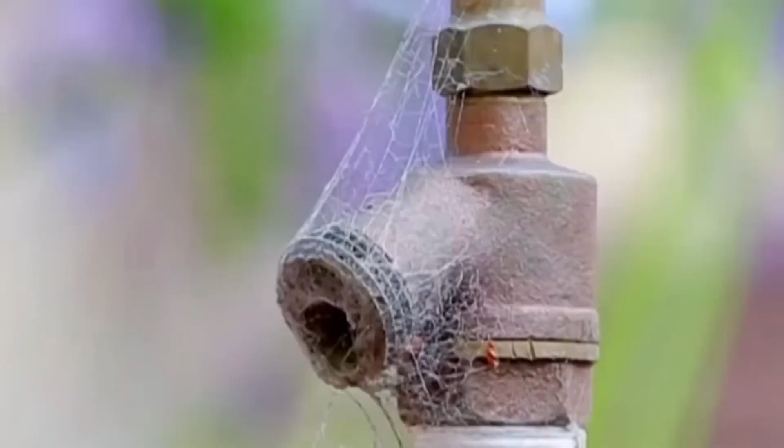At first glance, that might sound contradictory. California is notorious for its water shortages. In many parts of the state, residents are used to saving water year after year, cutting back on everything from showers to lawn irrigation. Farmers, who make up a large share of the state's water consumers, are under constant pressure to conserve every drop for their crops.

With such a strong emphasis on conservation and such tight regulations on water usage, how does building a massive new reservoir, one that releases a huge volume of water into a drought-prone region, make sense? Surprisingly, this is California's strategy to fight back against its increasingly unpredictable water future. Let's dig into the problem first.

California's geography is a major challenge when it comes to water availability. Large portions of the state are made up of deserts. Take the Mojave Desert, for example. It covers more than 13,000 square miles, but receives only 2 to 6 inches of rain per year. With temperatures regularly soaring over 100 degrees Fahrenheit, most of that rain evaporates before it can be of any use.

Then there's the Colorado Desert, covering another 10,800 square miles, where similar conditions prevail: hot, dry, and unforgiving. And don't forget about the sprawling Great Basin Desert, which extends into eastern California. It receives just 6 to 12 inches of rain annually, making the landscape inhospitable to large-scale water storage without major engineering. California's natural environment simply doesn't support stable, abundant water supplies.

But the situation gets even worse when you factor in the drought cycles. In July 2021, for example, Governor Gavin Newsom urged residents to reduce water usage by 15%. That wasn't new. In 2015, amid another severe drought, then Governor Jerry Brown mandated a 25% reduction in urban water use. Why such drastic measures?

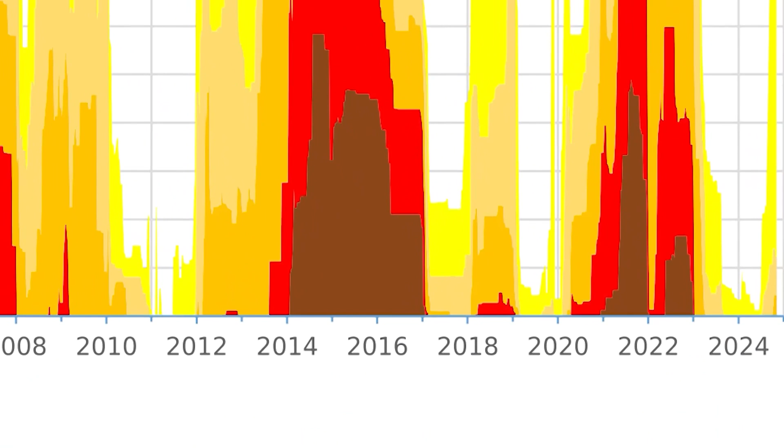It's a vicious cycle. And while these events vary in intensity, one thing is consistent. California regularly runs dangerously low on water. That's why restrictions are essential to prevent total water collapse during dry years.

Oddly enough, while the state was dealing with drought, some regions were hit by severe floods. During these rare but intense storms, hundreds of millions of gallons of rainwater fell in just days. Too much, too fast. The flooding damaged homes, infrastructure, and in some cases took lives. That's the paradox of California: not enough water when you need it, and too much when you don't.

Naturally, this contradiction sparked a big idea. What if California could capture floodwaters and store them for future use? This idea dates back to the 1950s and 60s, when the state first launched the California State Water Project, SWP. It led to the construction of one of the world's largest water infrastructure systems.

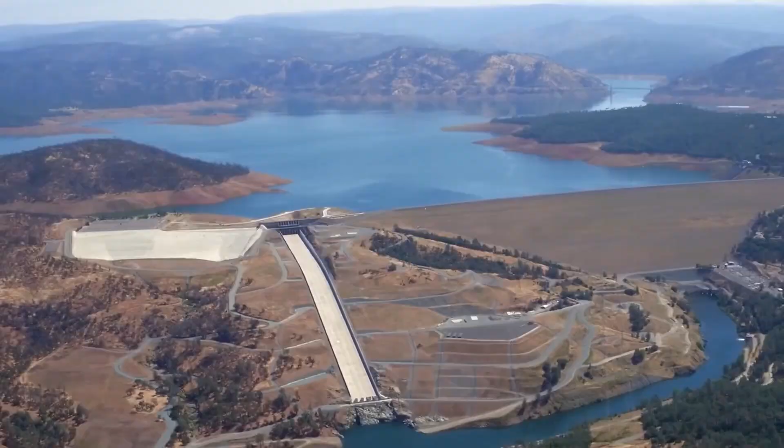Key components of the SWP include the San Luis Dam, which created the San Luis Reservoir, capable of storing 792 billion gallons. Another is Lake Oroville, formed by damming the Feather River, with a capacity of 1.1 trillion gallons. Water from these reservoirs is transported through a vast network of pipelines and canals. The centerpiece of this system is the California Aqueduct, a 460-mile water highway that moves water across regions, capable of carrying 98,000 gallons per second.

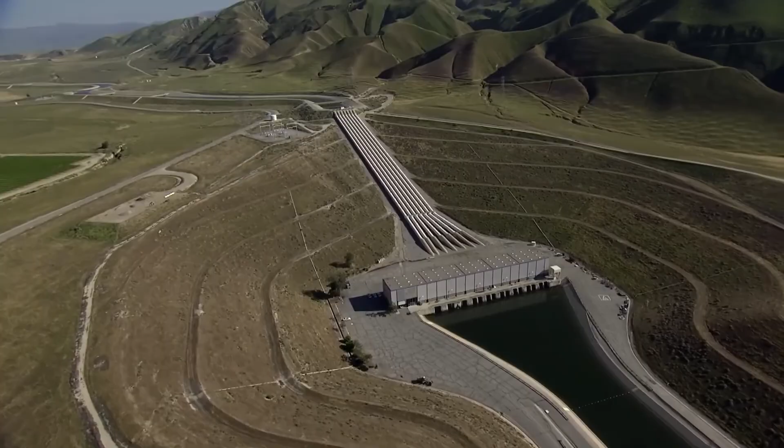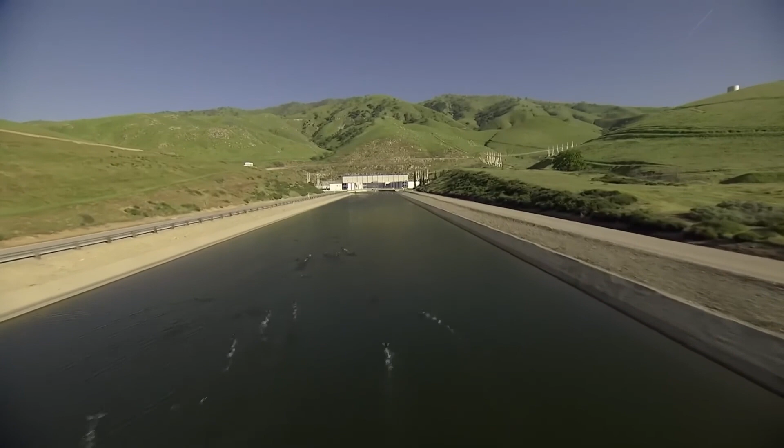At the southern end of the aqueduct lies the Edmonston Pumping Plant, one of the most powerful water lifting stations on Earth. To give you an idea of its might, it can lift water nearly 2,000 feet, higher than the Eiffel Tower. The SWP is a marvel of engineering, and it served California well for decades.

But over the years, demand has outgrown supply. The state's population has more than doubled. Agricultural and industrial needs have ballooned. Meanwhile, climate change has made rainfall patterns even less predictable.

That's why the state is building something new, the Sites Reservoir, just west of Maxwell. Why here? The location is ideal. The valley is shaped like a natural basin, surrounded by hills and mountains, minimizing the need for artificial barriers. It's lightly populated, which avoids the social disruptions that dams often cause. And with sparse vegetation, environmental impact is lower.

Planning for the reservoir started in 1996. Over the next 18 years, more than $50 million was spent on feasibility studies.

The project will require 12 dams, 3 large ones and 9 smaller ones, to contain the water. The tallest of these, the Golden Gate Dam, will rise 285 feet. Not quite a record breaker, but still impressive. For comparison, Lake Oroville's dam stands at 770 feet, making it the tallest in the U.S.

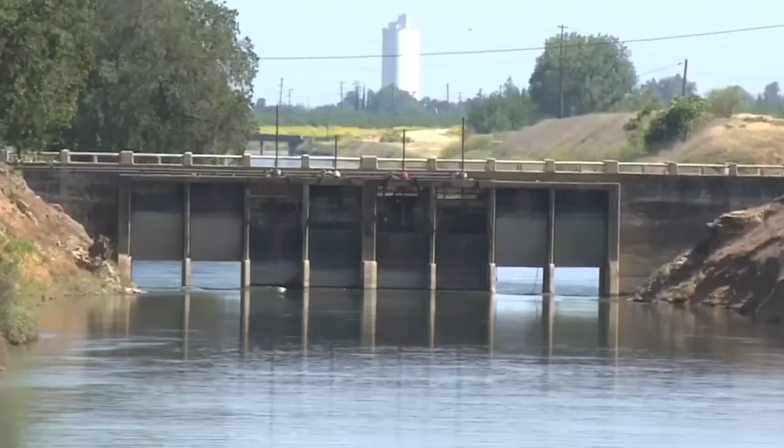The site's reservoir will be enormous. It will stretch 13 miles from north to south and 4 miles across, with a maximum depth of 262 feet. When full, it will store up to 475 billion gallons, ranking it among California's largest reservoirs.

But what makes sites truly unique is its off-stream design. Unlike traditional dams, it won't block a river. Instead, it will divert water from the Sacramento River, but only during times of high flow, and only after environmental and legal obligations are satisfied.

During droughts, water from sites can be released back into the system, providing a much-needed buffer against shortages. According to officials, the stored volume is enough to supply 7.5 million people for an entire year.

The water will be moved through existing infrastructure, pumping stations, pipelines, and canals, reducing the need for new construction and minimizing environmental disruption. And there's another advantage.

A large portion of the reservoir's water will be reserved for environmental purposes. California's ecosystems have suffered during past droughts. Sites is designed to stabilize river flows, improve wetland conditions, and even help endangered fish species, including the Sacramento salmon.

Because the reservoir won't sit on the river itself, salmon migration routes remain unobstructed. That's a major win for conservationists. Sites may also work in conjunction with Shasta Lake to deliver cold water, essential for salmon spawning.

Still, it's not all good news. Some environmental groups remain opposed. While sites won't directly dam a river, it will draw water from the Sacramento, and during peak diversion, it could take up to 60% of the river's flow.

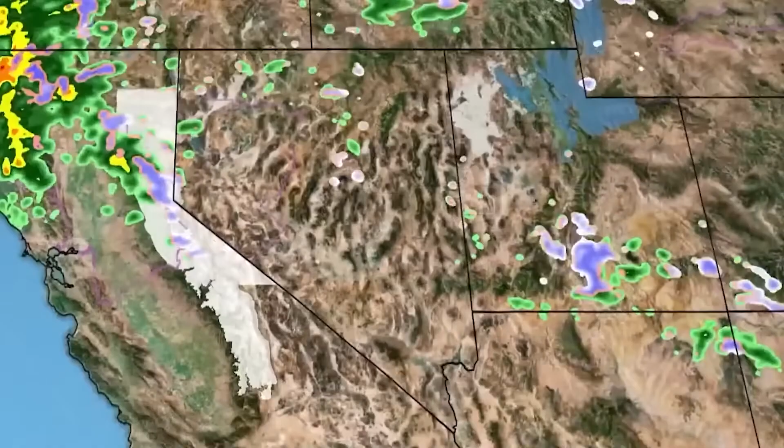Critics worry this could endanger not just salmon, but 23 other vulnerable species. Evaporation is another concern. With California's high temperatures, it's estimated that 9.7 billion gallons of water will evaporate from sites each year, water that will need to be replaced.

There's also the issue of emissions. In 2023, the group Friends of the River, backed by the Tell the Dam Truth campaign and funded by outdoor clothing brand Patagonia, released a report stating that the site's project could emit around 362,000 metric tons of CO2 annually during operation. Much of that comes from methane, released as submerged vegetation breaks down.

Despite these concerns, many believe the benefits outweigh the drawbacks. The site's reservoir is scheduled for construction between 2026 and 2032, and it's a key part of California's water strategy. But it won't be enough on its own.

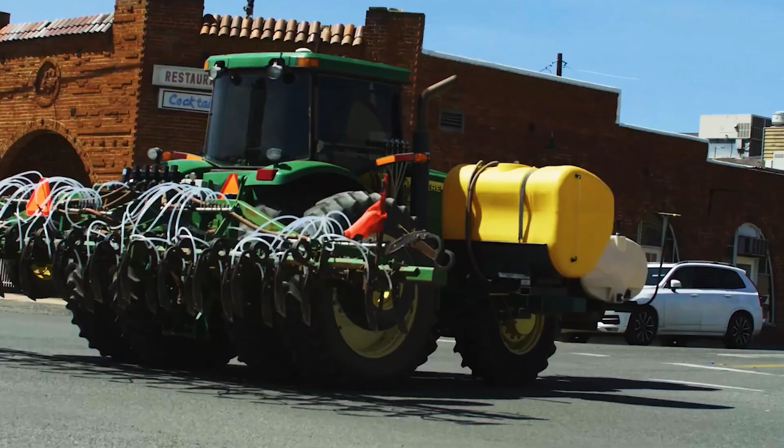That's why California is also turning to wastewater reuse. As of 2025, the state treats over 224 billion gallons of wastewater each year. Most of this is used in agriculture, which consumes about 80% of California's developed water supply. Reusing water here frees up more clean water for households and industry.

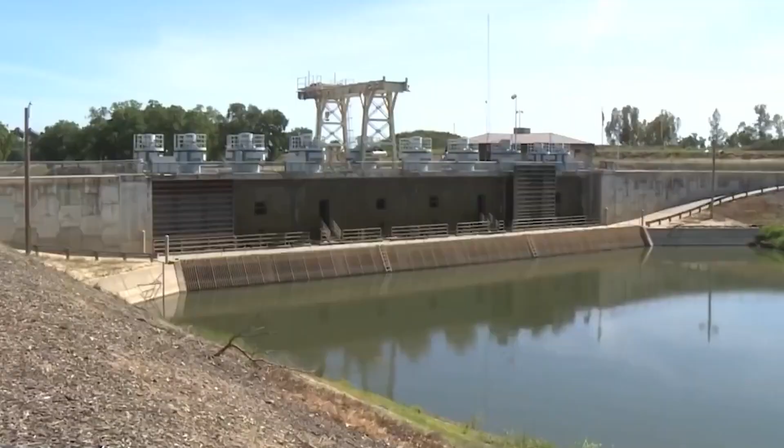The state is also investing in groundwater recharge, injecting treated water into aquifers for future use. In Orange County, one facility alone recharges 98 million gallons per day. Industries are also embracing recycled water for cooling systems, concrete mixing, and even paper production. Why? It's cheaper than raw fresh water and doesn't require extreme purification.

So maybe, in the not-so-distant future, California will finally break its cycle of drought and desperation, not by changing the climate, but by changing the way it stores, uses, and values water.

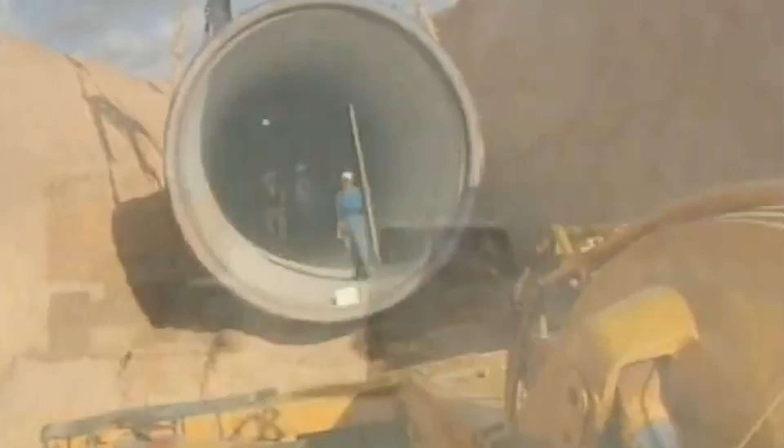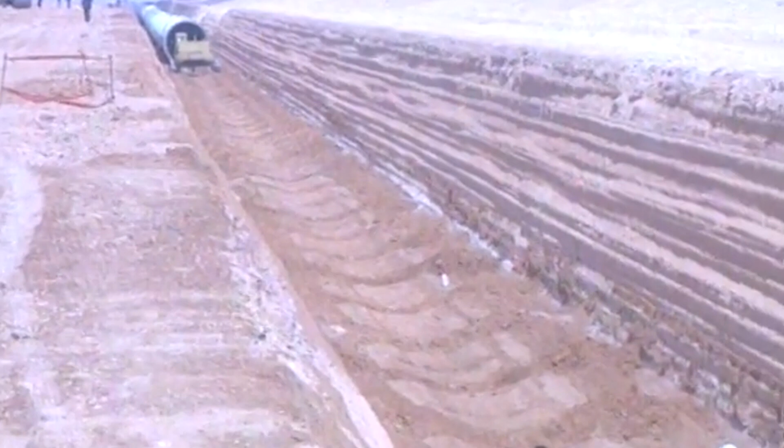This is the Great Man-Made River, a colossal engineering feat buried beneath the sands of Libya. Dubbed the world's largest irrigation project, the Libyan government even went as far as calling it the eighth wonder of the world. And to many, that wasn't just propaganda.

This bold and ambitious project was the dream of Libya's former leader, Muammar Gaddafi. His vision, to turn Libya's arid desert into fertile land as green as the Libyan flag during his regime, a completely green banner representing the Libyan Jamahiriya.

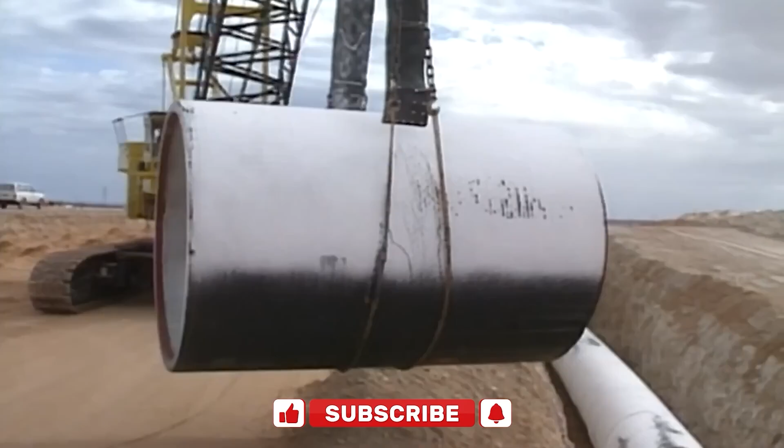But how close did they come to realizing that dream? How was this river built beneath the desert? And what has become of it today? Let's dive into the story of a river without a drop of surface water, a mega project born out of desperation, vision, and oil money.

Let's begin with the geographic reality of Libya. It's a country located in North Africa, with its entire northern edge lining the Mediterranean Sea. But beyond that narrow coastal strip lies a vast and unforgiving landscape, the Sahara Desert.

About 90% of Libya's land area is desert, and half of that is classified as sand desert, a literal sea of sand dunes and rock. Libya's biggest geographical disadvantage is its lack of freshwater resources. There are no permanent rivers or lakes to speak of.

Instead, it has wadis, dry riverbeds that occasionally fill with water after rare rainstorms, only to evaporate quickly. These conditions make Libya one of the driest nations on Earth. Most of the country's rainfall is concentrated in a tiny sliver along the coast, which makes up less than 5% of Libya's total area. Even there, average annual rainfall is just around 4 inches. In the interior, rain is practically non-existent, falling in brief heavy showers at the end of winter and early spring. That's it. Unsurprisingly, most of the population clusters in cities along the coast, where water is at least somewhat available.

According to data from 2020, nearly 80% of Libyans lived in urban areas, roughly 5.4 million people out of a total population of 6.8 million. In rural regions, people survive in small pockets, mainly around oases, using traditional irrigation methods for farming. But water access remains a constant struggle.

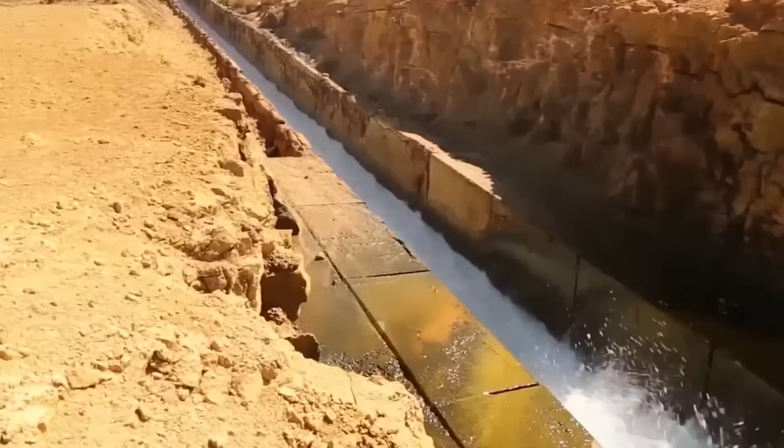Water scarcity is a well-known crisis in the Middle East and North Africa. The reasons are many: scorching temperatures, high evaporation rates, limited rainfall, and a growing population. Libya is a textbook example. In fact, the World Resources Institute ranks Libya as the 6th most water-stressed country on the planet.

Back in the 1960s, Libya began experimenting with desalination, removing salt from seawater to make it drinkable, but it was an expensive and limited effort. Then, in 1969, everything changed. Muammar Gaddafi seized power in a military coup, and soon his administration began eyeing a much grander solution: the Great Man-Made River Project. Interestingly, Libya's water woes actually predate Gaddafi.

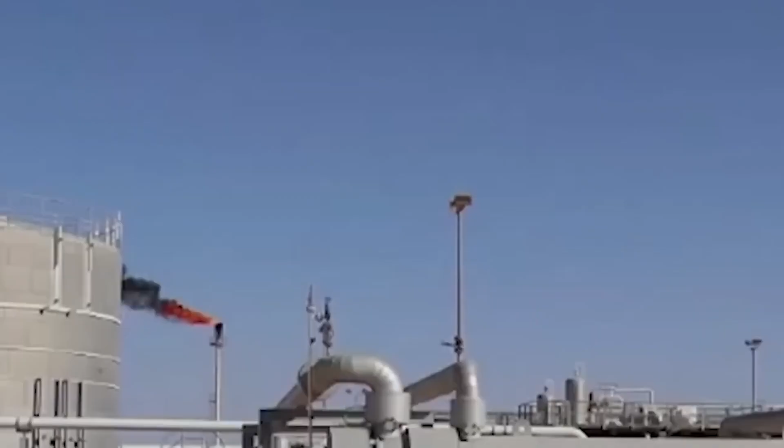During the 1930s, under Italian colonial rule, water shortages were already a major issue, but back then Libya lacked the money, manpower, and technology to tackle such a challenge. That all changed in the 1950s, when oil exploration began in earnest. In 1953, while drilling for oil in southern Libya, foreign companies made an unexpected discovery. Not only did they strike large oil reserves, they also tapped into massive underground reservoirs of freshwater. It was like hitting the jackpot twice.

Further studies revealed that this water came from the Nubian sandstone aquifer system, one of the largest fossil aquifers in the world. This ancient groundwater is believed to be between 10,000 and 1 million years old, formed back when the Sahara was a much greener, wetter region. Over millennia, this water became trapped deep underground beneath thick layers of sandstone. The aquifer stretches beneath 4 countries: Libya, Chad, Sudan, and Egypt, covering an astonishing 770,000 square miles. It's estimated to contain around 39 quadrillion gallons of water. That's an almost incomprehensible amount.

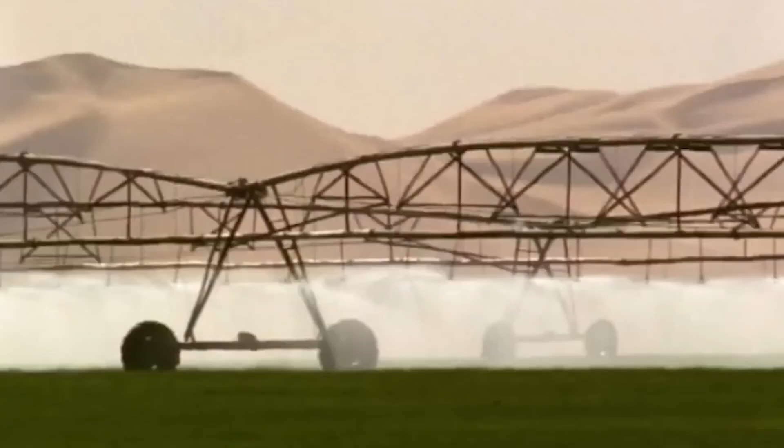At first, the Libyan government considered using this water for large-scale desert agriculture, but by the early 1980s the strategy shifted. A new plan emerged: instead of trying to farm in the desert, why not transport the water to the densely populated coast? It seemed far more feasible than investing in costly desalination plants that the country couldn't afford to operate or maintain.

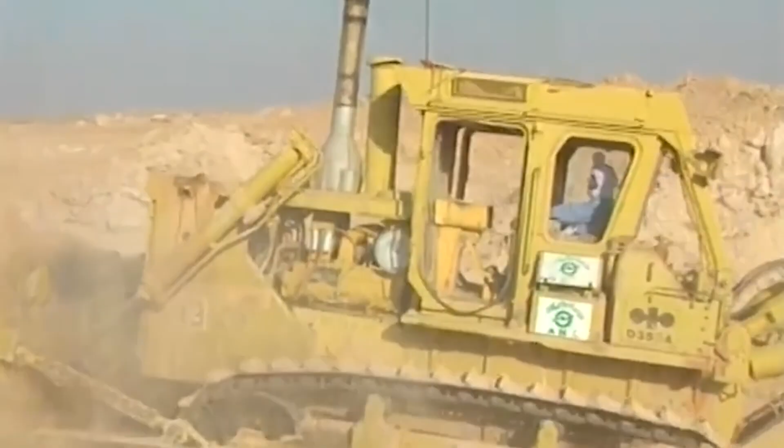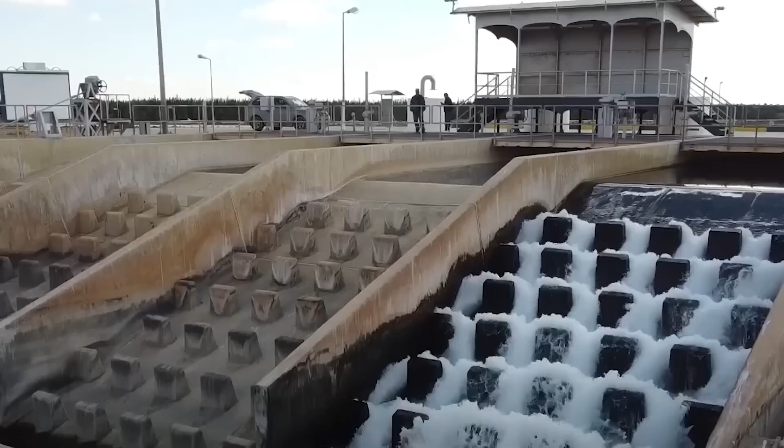The coastal aquifers, especially around Tripoli, were also becoming increasingly salty and polluted due to overuse. Meanwhile, a giant reservoir of pristine freshwater lay untouched in the desert interior. The only problem? No one lived near it. The water had to be brought hundreds of miles across harsh, empty terrain. Thus, the Great Man-Made River Project was born.

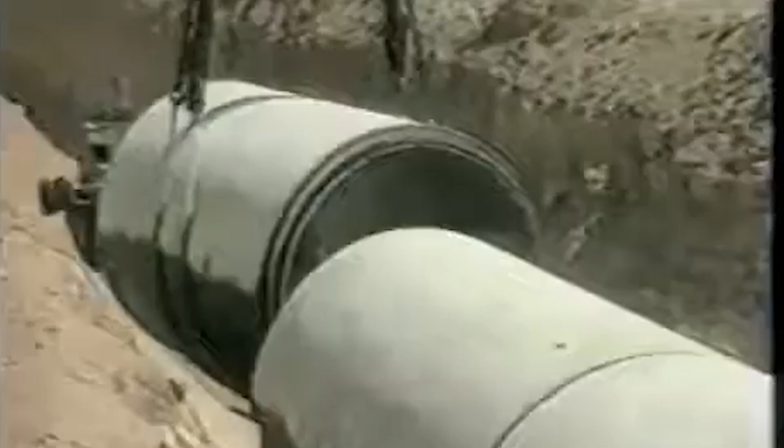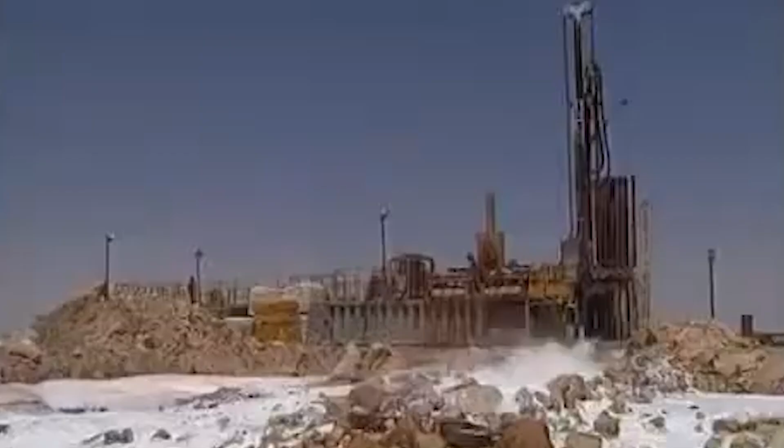Despite its name, it's not a river at all, but an immense network of underground pipes, aqueducts, reservoirs, and pumping stations designed to move water from the heart of the desert to Libya's cities and farmlands along the Mediterranean coast. But building such a river was no small feat. Construction was divided into multiple phases. The idea was to drill deep wells, some over 1,600 feet into the ground, tap into the aquifer, and then transport the water through a massive system of pipes.

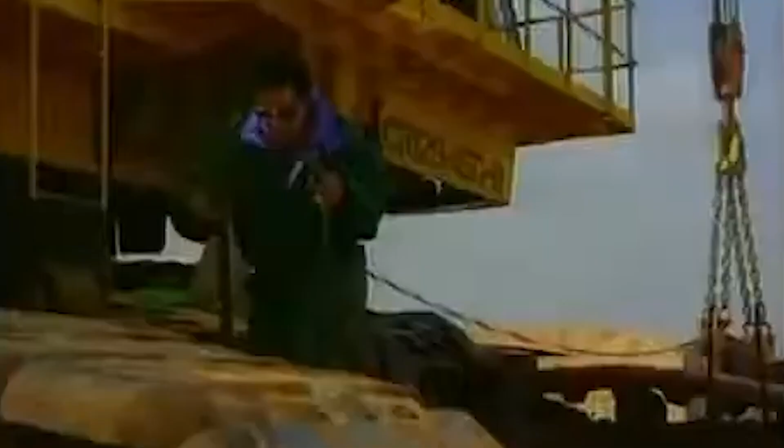By the time it's completed, the network is expected to span over 2,500 miles, with a capacity of more than 1.6 billion gallons per day. In 1984, Gaddafi officially launched the project and laid the foundation stone near the Sarir Aquifer in eastern Libya. The first phase of the project, known as GMR-1, was focused on 2 fields, Tazerbo and Sarir.

Hundreds of deep wells were drilled, and the water was pumped through twin pipelines to Ajdabia, where it was stored in large reservoirs. From there, it was distributed to the coastal cities of Benghazi and Sirte. By 1991, Phase 1 was complete. It consisted of a 990-mile-long double pipeline capable of transporting 528 million gallons of water per day.

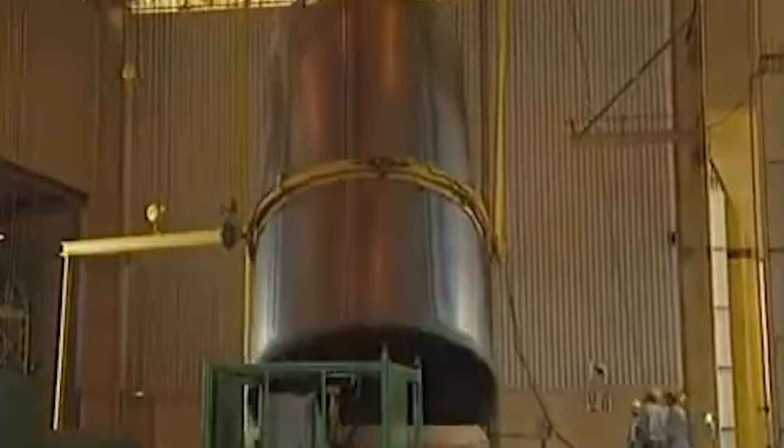To build it, engineers installed a staggering 250,000 sections of reinforced concrete pipe, each 13 feet wide and 23 feet long. These were the largest precast concrete pipes ever made at the time, manufactured at 2 giant plants inside Libya using steel-reinforced, pre-stressed concrete. The pipes were placed into 23-foot deep trenches using custom-designed cranes and bulldozers. Each joint was sealed with heavy-duty rubber gaskets and cement grout before being buried.

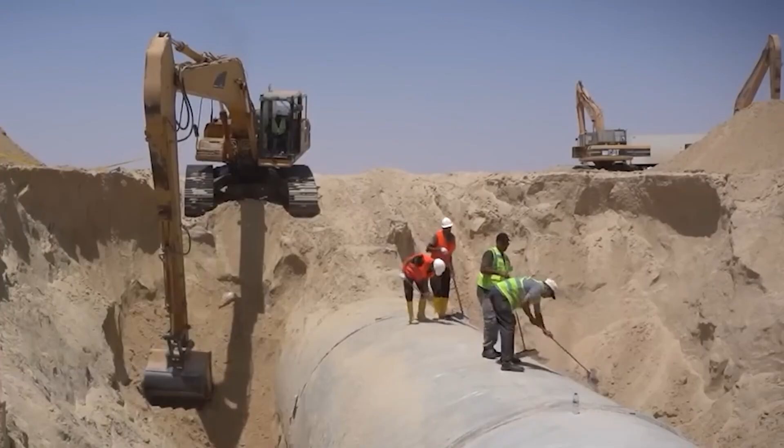The construction also included massive reservoirs. For instance, one reservoir near Ajdabia spans over 3,300 feet in diameter and holds more than 6 billion gallons of water, essentially a man-made lake. The numbers are jaw-dropping: over 5 million tons of cement were used, enough to build 20 Great Pyramids of Giza.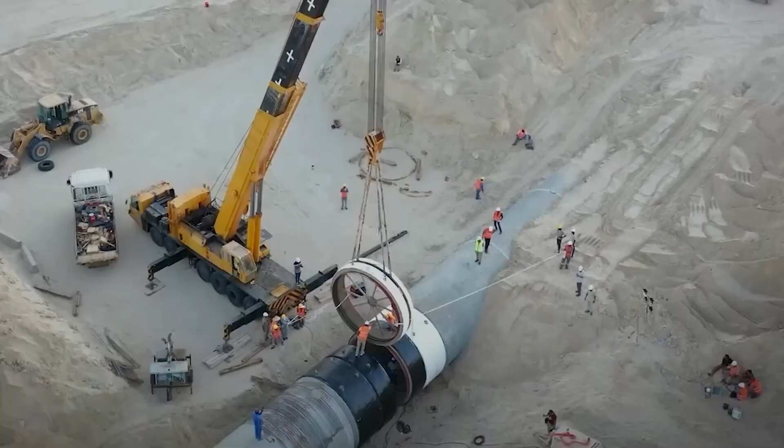The amount of steel wire used in the pipe reinforcement could encircle the Earth 280 times. Just to appreciate the scale, consider this: Libya even built a monument out of one of these pipe segments to showcase the size of a single piece.

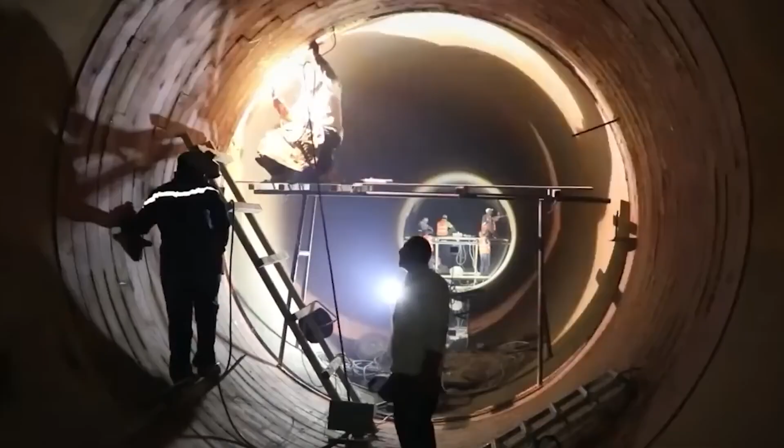Following the success of Phase 1, the second major section, GMR-2, was launched in western Libya. Its goal was to supply water to the capital, Tripoli. Phase 2 began delivering water in 1996, pulling from wells in the Jabal Hasawna area. Additional phases were planned to connect other regions of the country, with the long-term vision of supplying water for agriculture, domestic use, and eventually industry.

Water from the Great Man-Made River was intended to revolutionize farming in Libya. In theory, it would irrigate thousands of acres of land, boost food security, and reduce reliance on imports. And for a time, it seemed to be working.

But the project wasn't without criticism. Many scientists warned that fossil water is a non-renewable resource. Once it's used up, it's gone forever. The Nubian aquifer is not actively replenished, especially not in a region where rainfall is so rare. Some also questioned the environmental and geopolitical implications of extracting water shared by multiple countries.

Then came the civil war. After Gaddafi's fall in 2011, Libya plunged into political chaos. Maintenance of the Great Man-Made River became difficult. Many of the pumping stations and pipelines were damaged during the conflict. In recent years, armed groups have even used water flow as a bargaining chip, cutting supply to cities like Tripoli for political leverage. What was once a national symbol of pride is now struggling to stay functional.

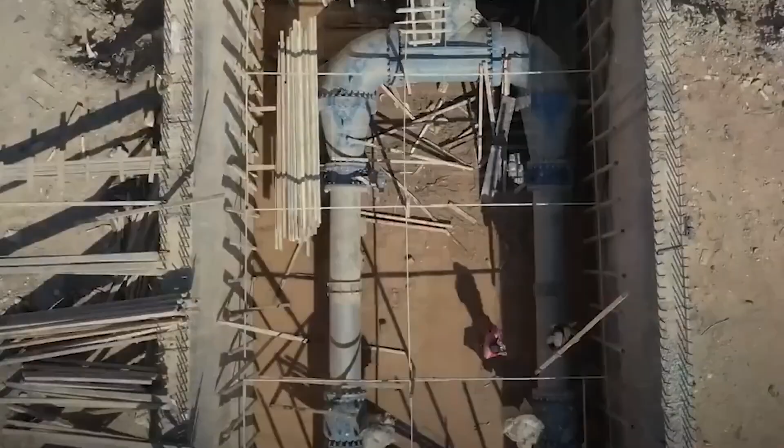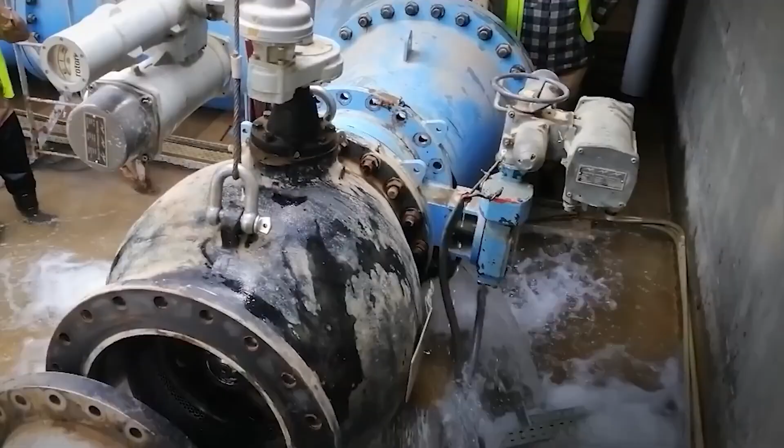Still, the Great Man-Made River remains a powerful example of human ingenuity, a testament to what's possible even in one of the harshest environments on Earth. Whether it will continue to provide water to future generations, however, depends on Libya's stability, resources, and commitment to managing this fragile legacy. So, did they manage to turn the desert green? For a moment in history, they came close, but the river, like the nation that built it, now stands at a crossroads.

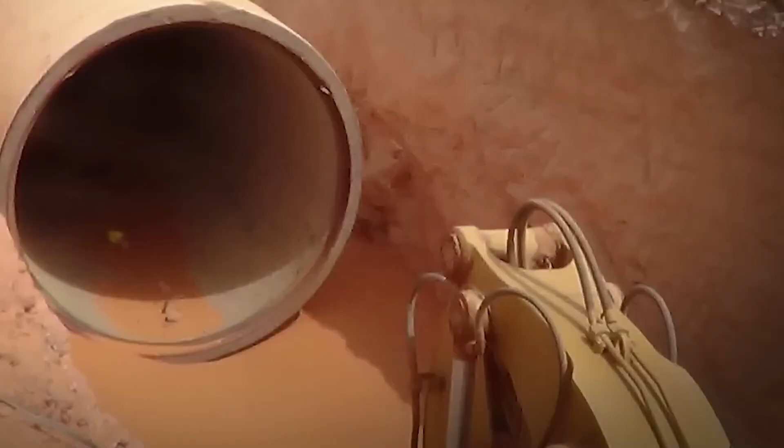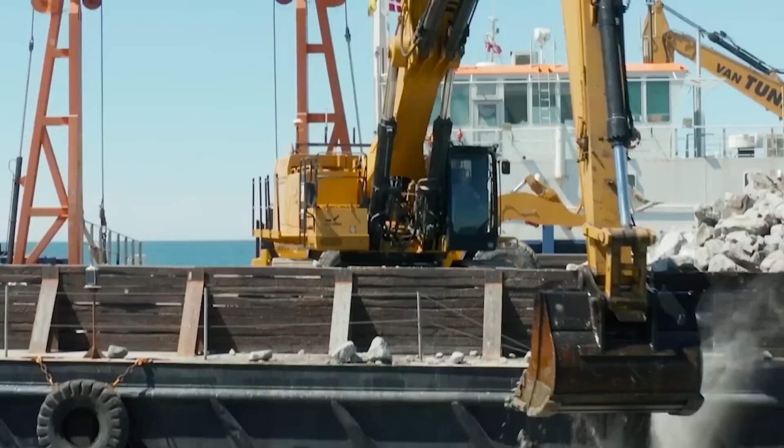There are 9 countries that border the Baltic Sea, but recently, global attention has focused on just 2 of them: Germany and Denmark. Why? Because nestled between these 2 nations is the site of one of the most ambitious infrastructure projects in European history.

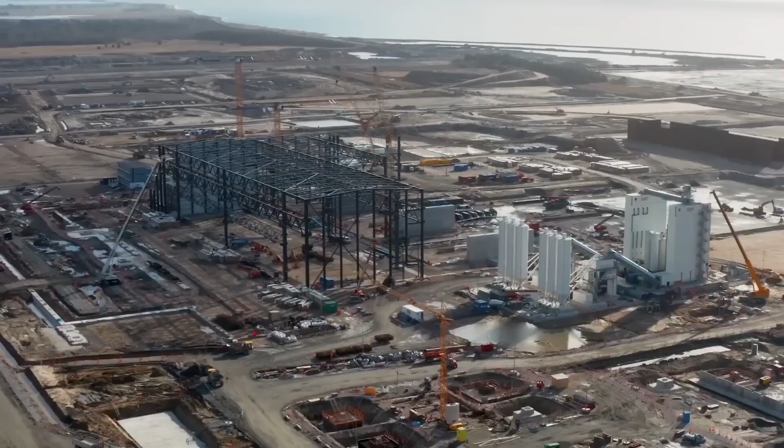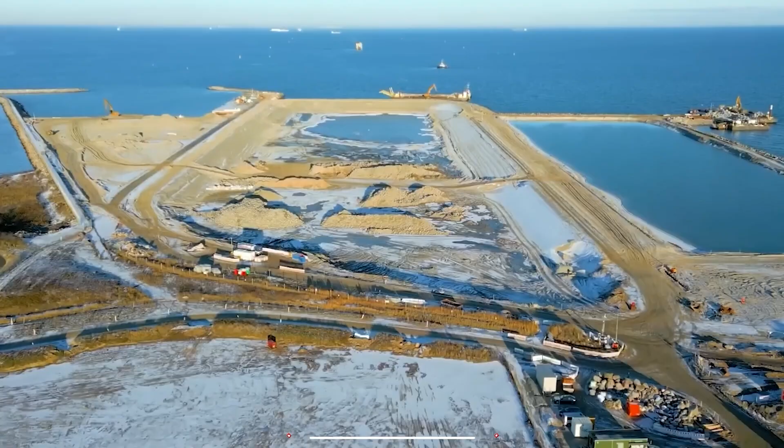If you sail through this area, you'll notice something unusual: artificial land formations, newly carved out channels leading into the sea, and at times, as many as 70 ships scattered across the horizon. Not exactly your average maritime traffic. These vessels weren't there for sightseeing. They were part of a massive operation that involved digging up more than 76 million cubic feet of soil and rock from the seabed. So what's going on here?

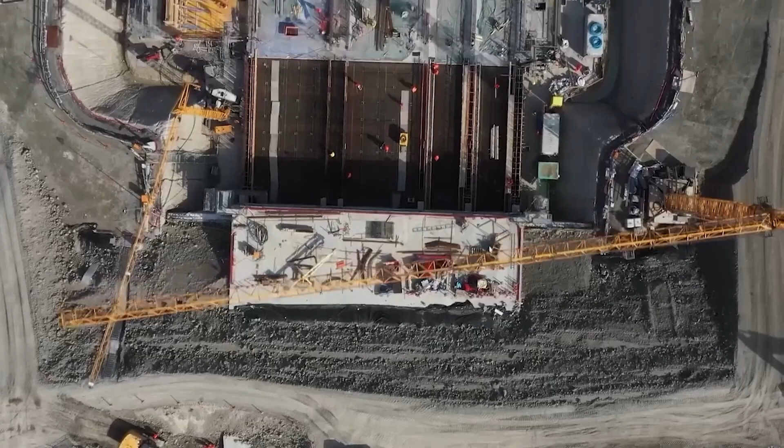It's all part of the Fehmarnbelt Fixed Link, a 10 billion euros megaproject that's not just rewriting engineering records, but also transforming how Europe connects. Off the coasts of Germany and Denmark, 2 entirely new harbors have been constructed, each capable of handling nearly 100,000 tons of raw materials per week. An enormous production plant, covering roughly 11 million square feet, has also sprung up.

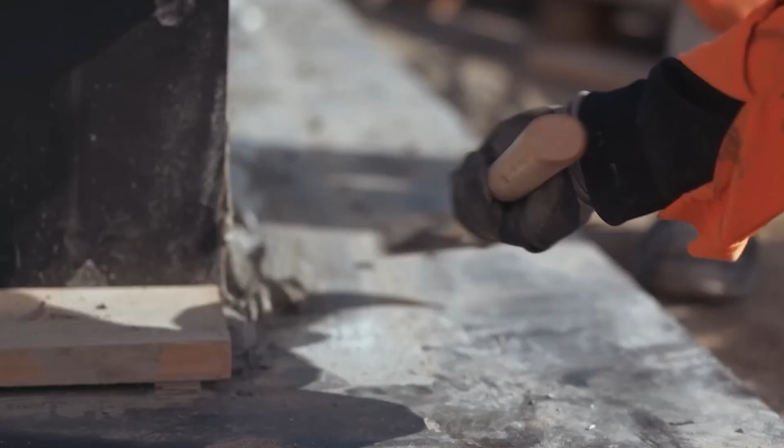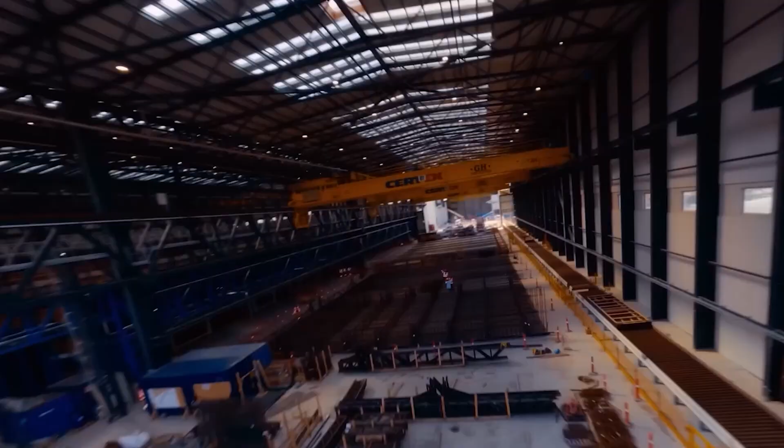All of this is to make way for a tunnel. But not just any tunnel. This project is building what will soon be the world's longest immersed combined road and rail tunnel, a direct connection between the German island of Fehmarn and Denmark's Lolland Island. Up until now, crossing between the 2 meant relying on a ferry, a process that involved queuing up, boarding, and sitting through a 45-minute ride across the strait.

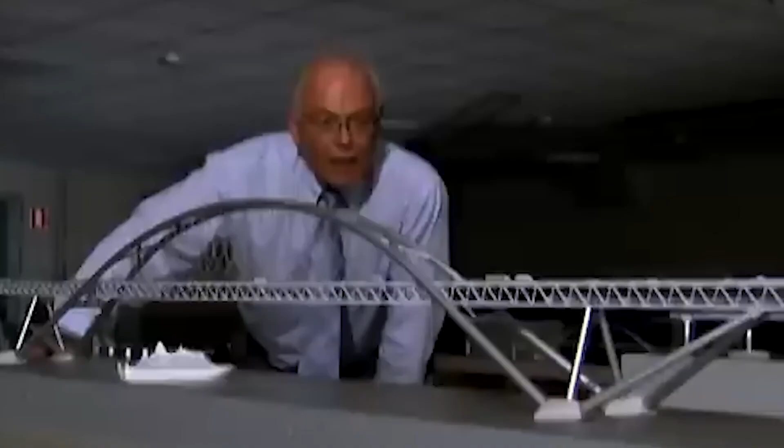And that's on a good day. Storms, strong winds, or fog could easily delay service by hours, so the idea of a permanent, fixed link has been on the drawing board for decades, since at least the 1990s. Initially, the concept was to construct a 12-mile cable-stayed bridge with a 4-lane highway and 2 electrified railway tracks. The design was dramatic, featuring 4 giant pylons, each nearly 920 feet tall, and 3 central spans, each stretching 2,375 feet.

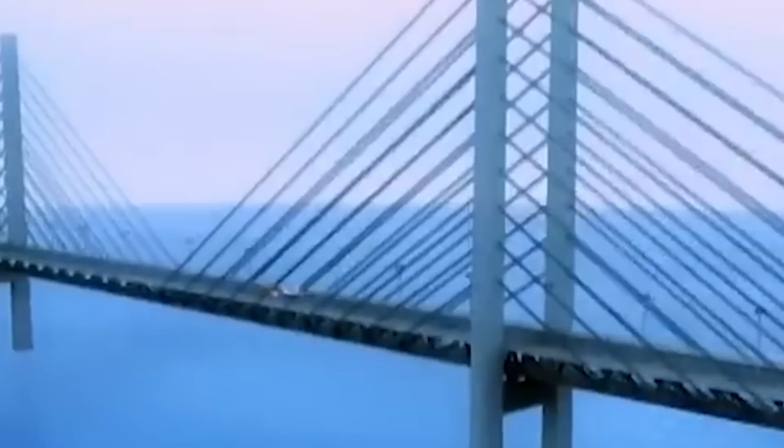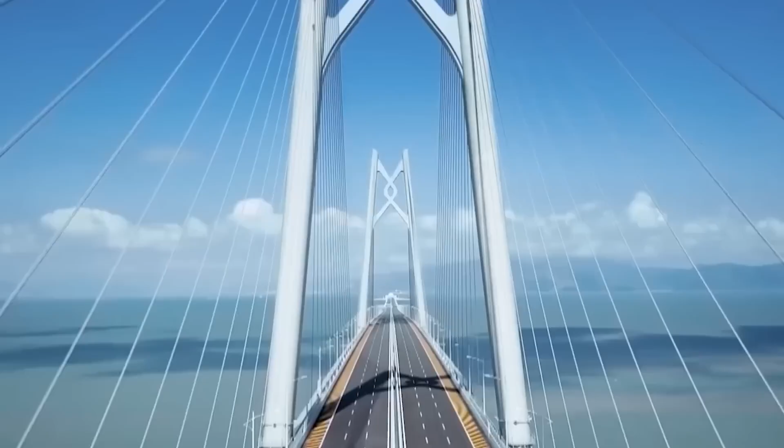If built, it would have set world records for the longest spans on a combined road-rail bridge. Construction was supposed to begin with the goal of opening in 2018. The Danish company Femern AS was awarded the contract to develop the project. But then came a major pivot. In 2010, after extensive studies and engineering assessments, Femern AS concluded that a tunnel would be the better option. The reason? Fewer technical risks and a more predictable construction process.

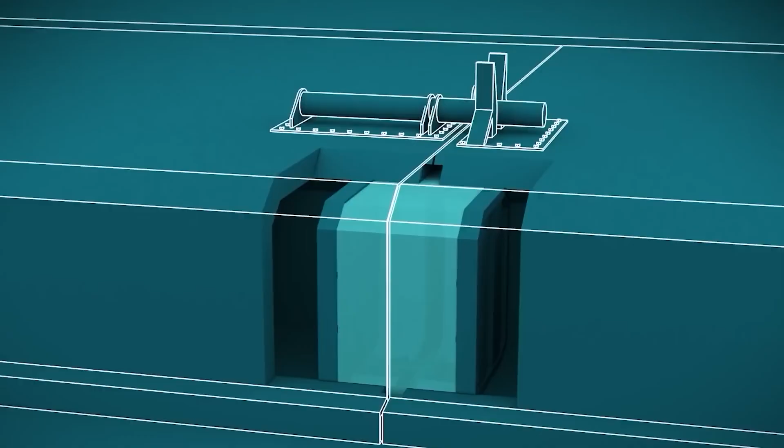The seabed's geology, with its challenging mix of soft clay and hard limestone, made the bridge option far more complex and risky. Plus, the cost difference between the bridge and the tunnel was surprisingly small: 5.2 billion versus 5.5 billion euros. Construction time wasn't drastically different either: 5.9 years for the bridge versus 6.5 years for the tunnel. So the plan shifted. The tunnel became the official design. The tunnel, once complete, will stretch 11 miles, about 18 kilometers, and carry both road and rail traffic.

It will consist of 2 double-lane motorways, 2 electrified railway tracks, and a service tunnel in the center. To support such a massive structure, construction had to start not just with digging, but with building the facilities required to produce and transport the enormous materials needed.

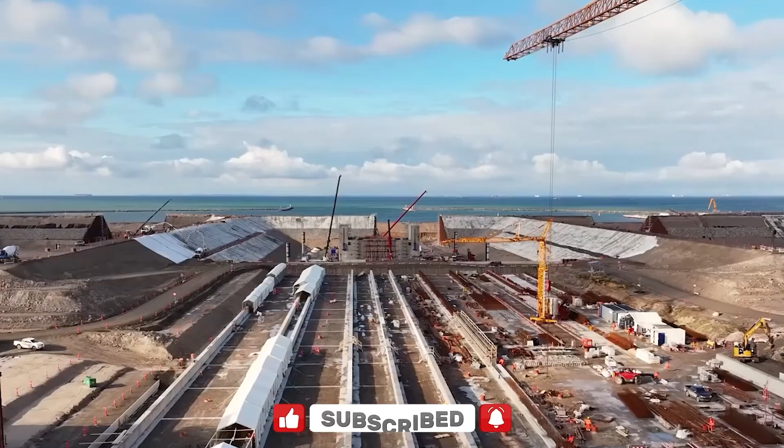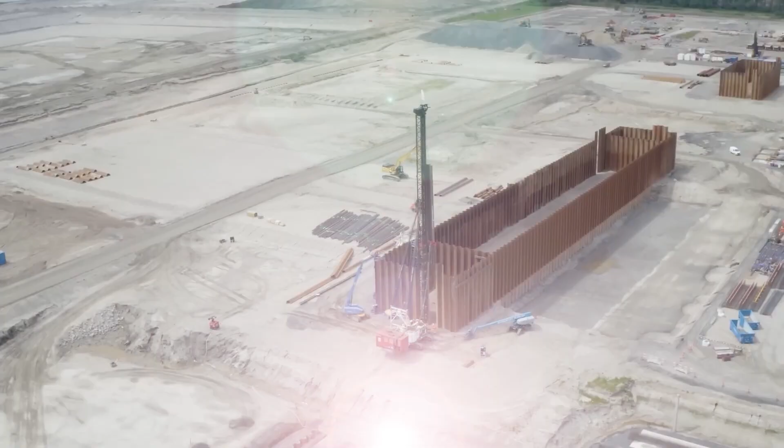That's where the gigantic manufacturing plant comes in. Built near the Danish town of Rødbyhavn on Lolland, this facility is the largest of its kind in the world. Inside, 6 production lines churn out the precast concrete elements that will form the tunnel. Each segment is a monster in its own right, 712 feet long, 131 feet wide, and 33 feet high. And they weigh a staggering 73,500 tons, just shy of a fully loaded cruise ship.

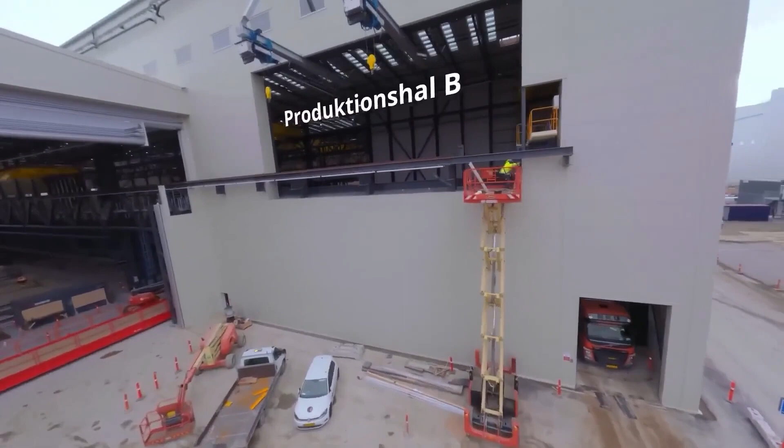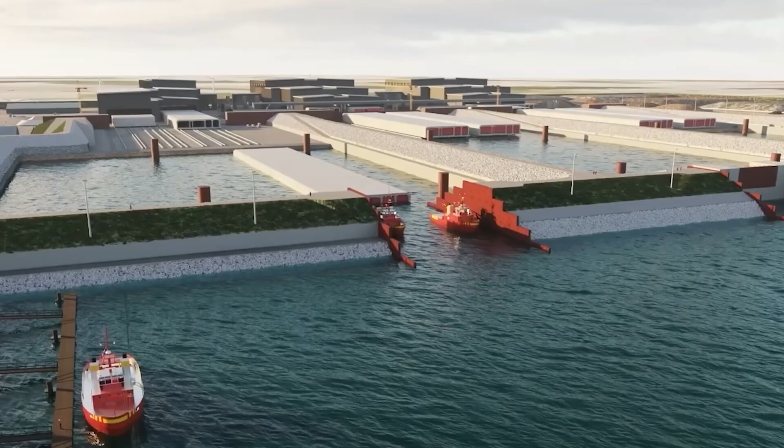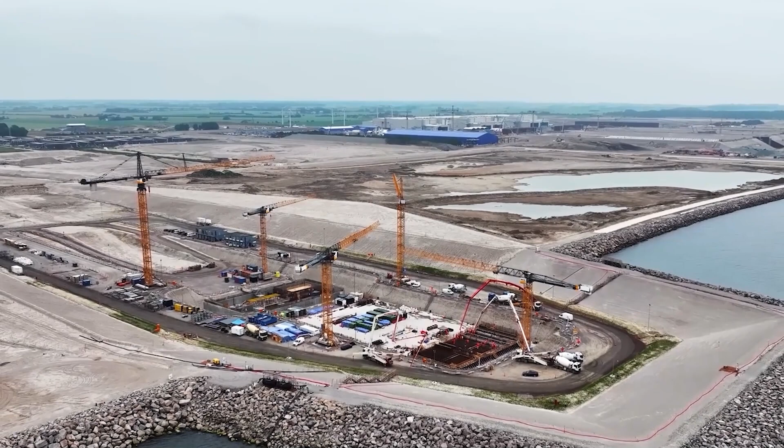In total, 79 of these standard tunnel segments will be needed. On top of that, special segments will be created to house technical equipment and emergency access systems. And since transporting these massive tunnel elements from distant locations would be logistically impossible and prohibitively expensive, the production plant was strategically built just a few miles from the actual tunnel site. Even the harbors were purpose-built to receive raw materials like gravel, sand, cement, and steel, capable of handling tens of thousands of tons weekly. The German side at Puttgarden also got its own smaller port to support the construction effort.

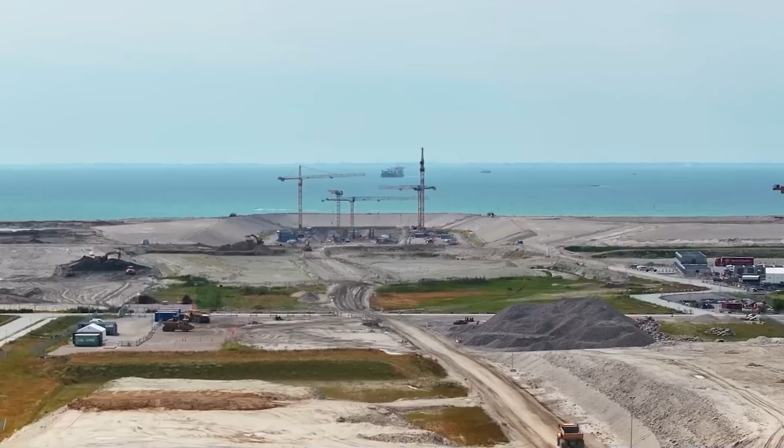By 2024, dredging operations were in full swing. Ships of every kind filled the Fehmarnbelt, cutter suction dredgers, trailing suction hopper dredgers, and specialized stone clearance vessels. Their mission was to dig an 11-mile trench between Fehmarn and Lolland. The trench measured up to 164 feet wide and almost 50 feet deep. The seabed's natural conditions were tough, ranging from soft clay to hard limestone, but the specialized fleet handled it all.

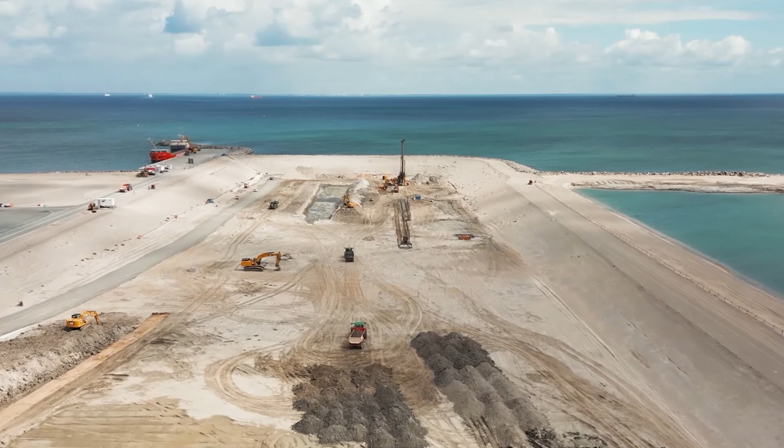Rather than dumping the excavated material, engineers decided to reuse it. The soil and rock were transported to a designated area off Rødbyhavn to create 741 acres of new land. This reclaimed land will eventually become a mix of natural habitat and recreational zones, complete with beaches, parks, and trails.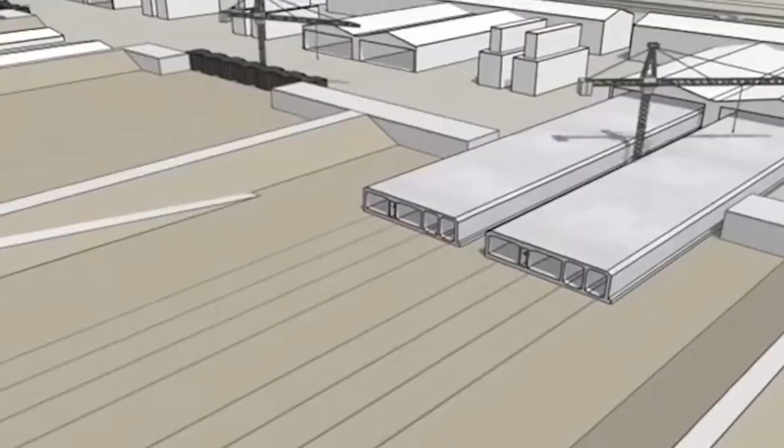With the trench now complete and reinforced with gravel, the next monumental step begins, laying down the tunnel sections. Entrances to the tunnel have already been constructed on both Lolland and Fehmarn. These massive portals serve as gateways for the submerged structure that will rest beneath the sea.

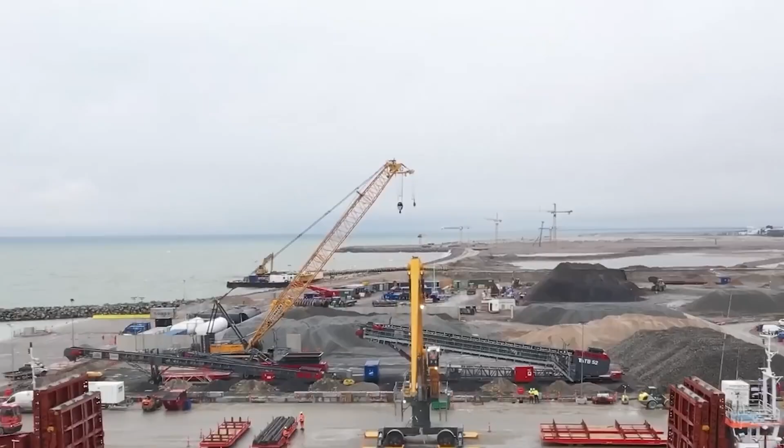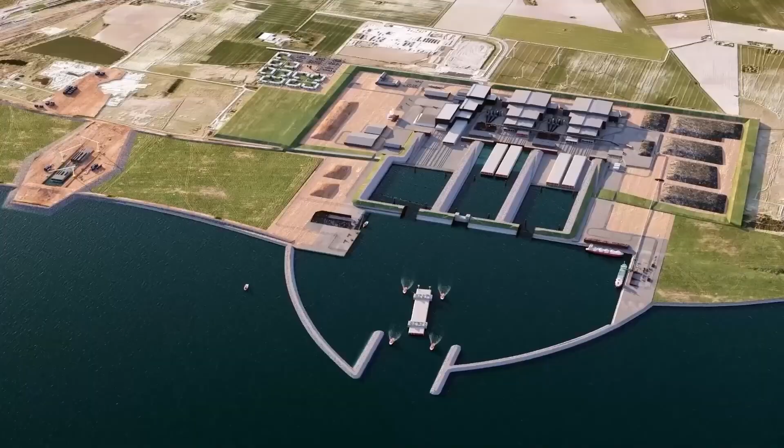Transporting and positioning each tunnel section is no small task. Each segment will be attached to floating pontoons, then guided into place by tugboats. This delicate process, known as immersion, won't be done remotely. It will be operated from a control room located on one of the pontoons. A team of 22 people will oversee the process, using high-precision underwater cameras and positioning systems to guide the section into the trench with an accuracy margin of just half an inch.

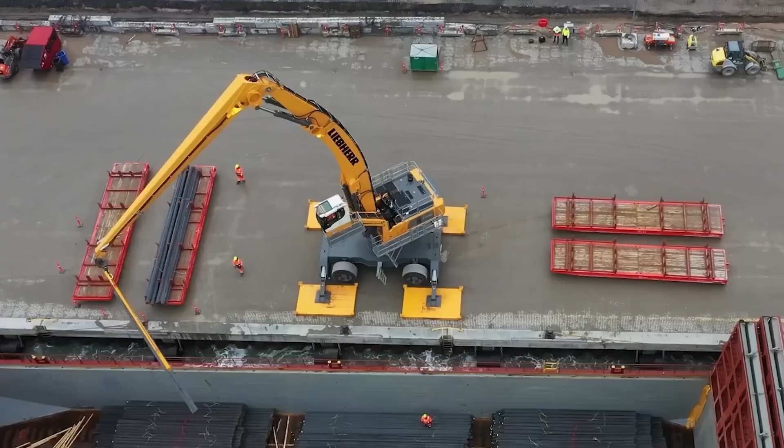Once each section is perfectly placed, large rubber gaskets, engineered to last 120 years, will be installed between them to ensure watertight seals. Then, layers of soil will be placed back over the entire tunnel, burying it beneath the seabed. In the end, this will be a tunnel that is both underwater and underground.

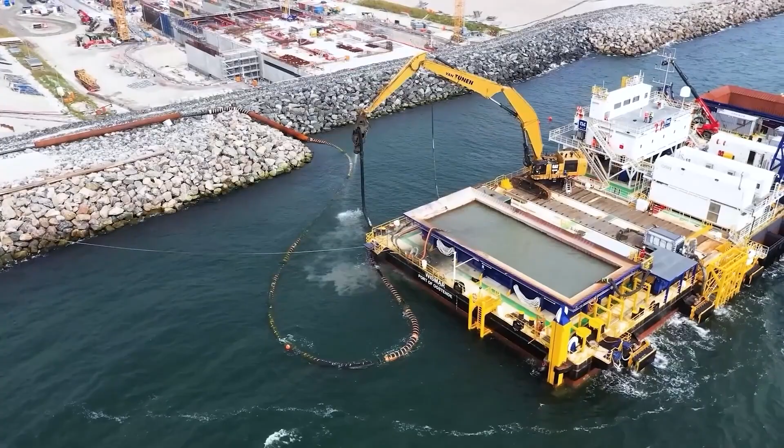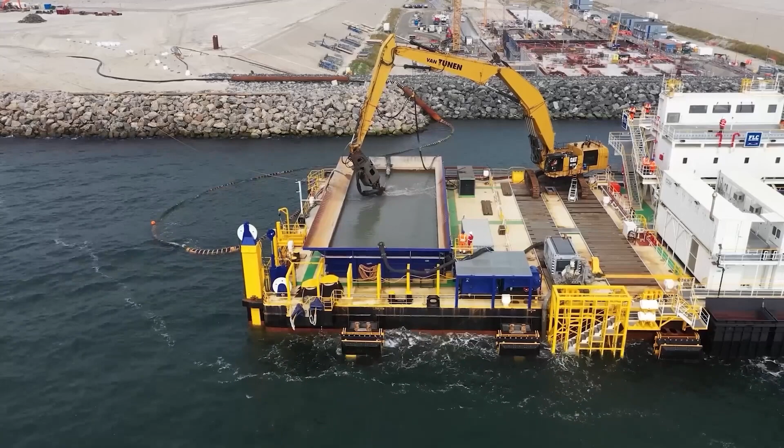But if installing just one tunnel segment takes up to 40 hours, how long will the whole project take to complete? That's the million-euro question. When plans were first floated in 2012, the goal was to open the tunnel by 2021. A few years later, the date was pushed to 2024, then 2028. Finally, in 2020, the official opening date was set for 2029.

Many are eagerly awaiting that year because the benefits of this tunnel will be enormous. Travel time will be slashed dramatically. What is currently a 45-minute ferry ride will become a 10-minute drive through a modern tunnel. Even better, high-speed trains will cross the same route in just 7 minutes, reaching speeds of up to 124 miles per hour.

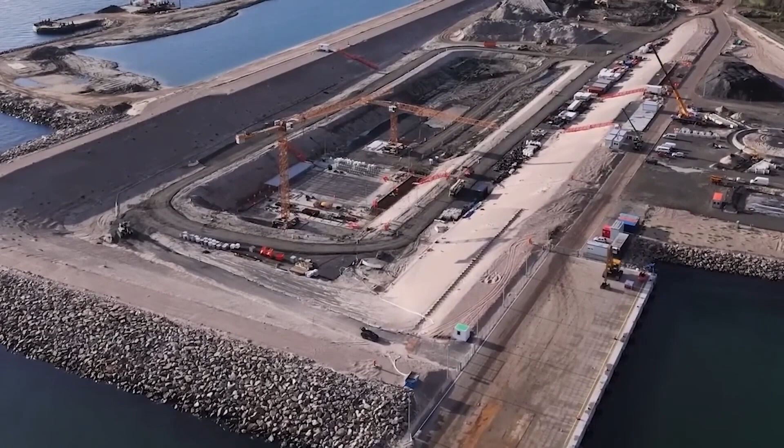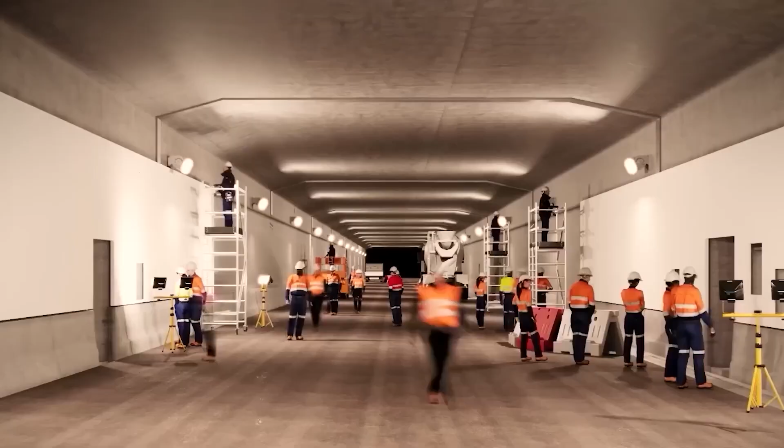It will also strengthen the Trans-European Transport Network, TEN-T, the EU's plan for integrating infrastructure across member states. In short, the Fehmarnbelt Tunnel is more than a regional project. It's a continental game-changer, and it's breaking records along the way. When finished, it will hold the title for the world's longest immersed tunnel, the longest combined road and rail tunnel, the longest underwater road tunnel, and the second deepest underwater concrete tunnel ever built.

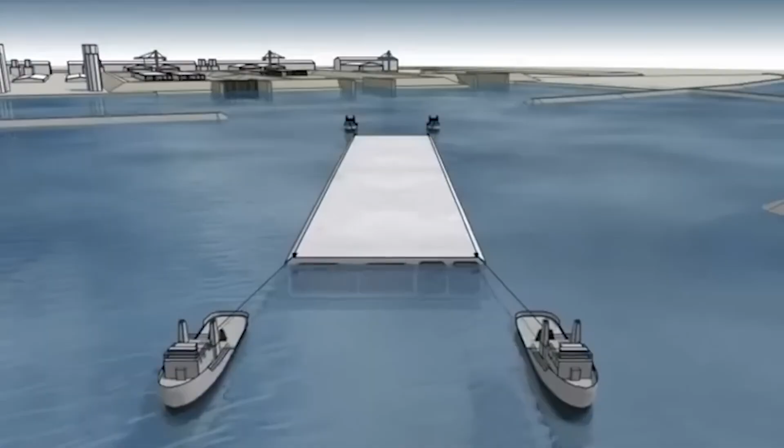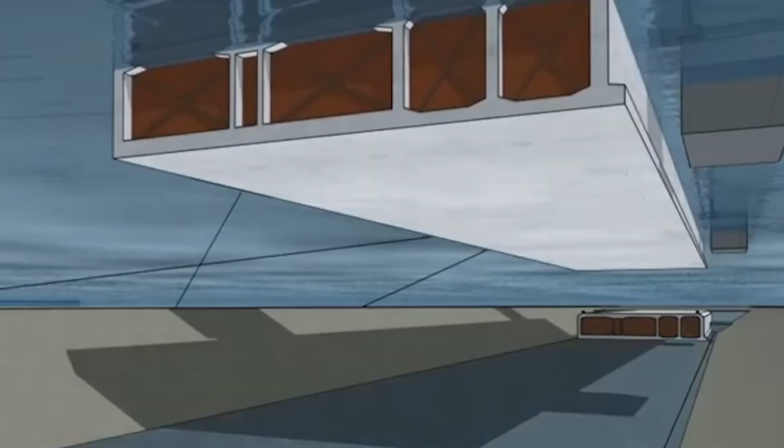It's not just a feat of engineering, it's a symbol of ambition, collaboration, and the future of European connectivity. From blueprint to reality, the Fehmarnbelt Fixed Link is a marvel in motion. And as the countdown to 2029 continues, it's already shaping up to be one of the defining infrastructure projects of our era.